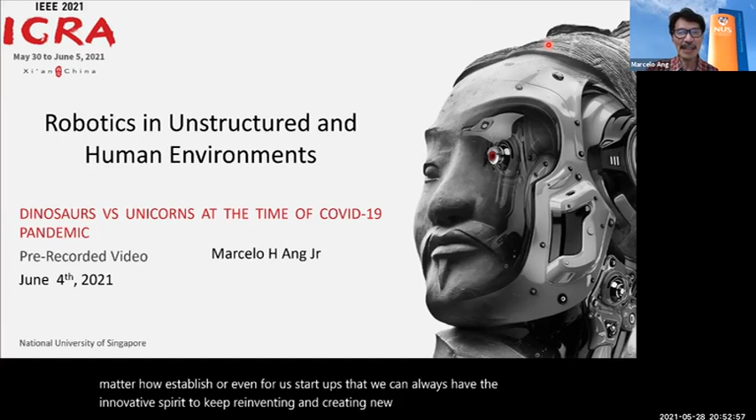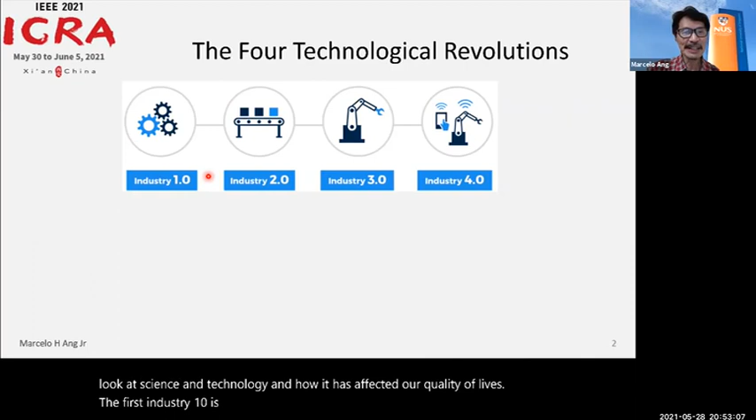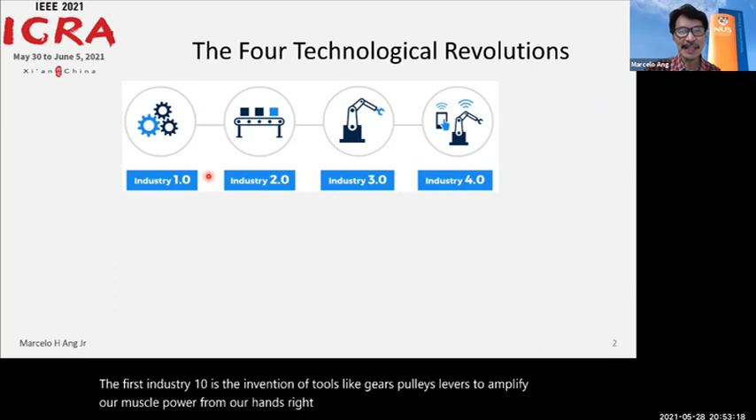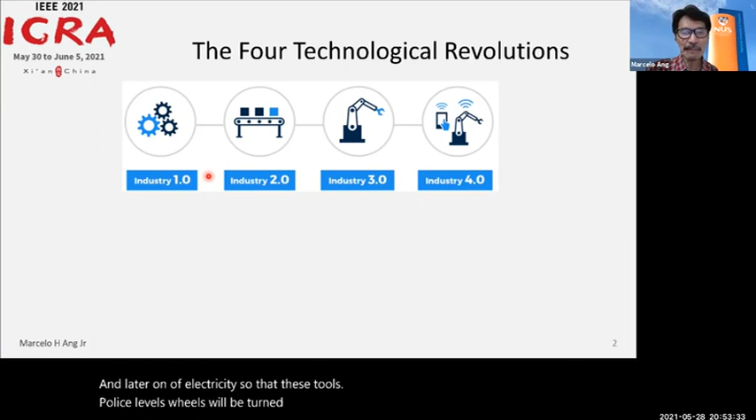So let's look at science and technology and how it has affected our quality of lives. The first Industry 1.0 is the invention of tools like gears, pulleys, levers to amplify our muscle power from our hands, using mechanical advantage. Then came the invention of steam power and later electricity, so that these tools, pulleys, levers, wheels, will be turned by electrical or steam power, no need for muscle forces, human hands.

Then came the birth of computers, and this gave birth to robotics and automation, where the computers will create the programs or run the programs to make the links of the robot move. These robots move in structured environments where the infrastructure is fixed and there's human-robot separation.

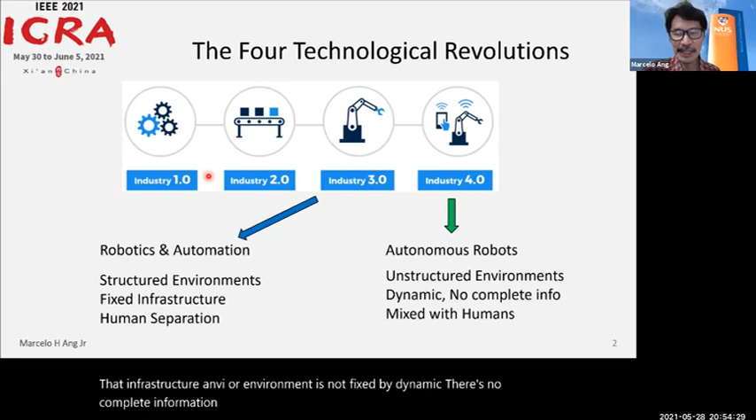Today, Industry 4.0 is really taking this further into autonomous robots, from factory automation to autonomous robots working in our homes. Instead of structured environments, it will now be in unstructured environments. The infrastructure environment is not fixed but dynamic. There's no complete, known information about the environment. And there is a mixture - humans and robots work together in everyday life. In other words, the robot is our ultimate tool, our ultimate human companion to help in our everyday lives.

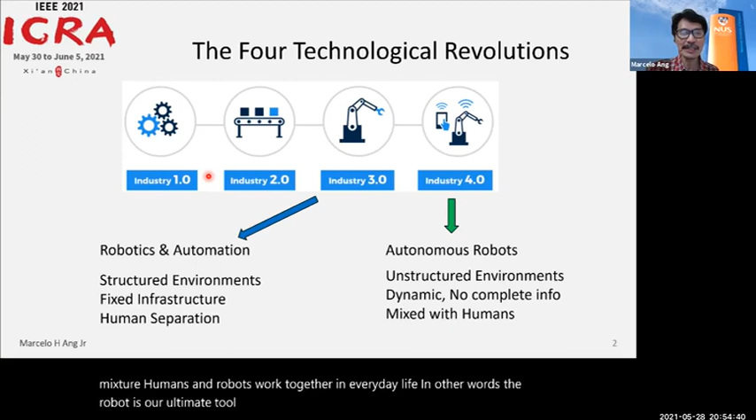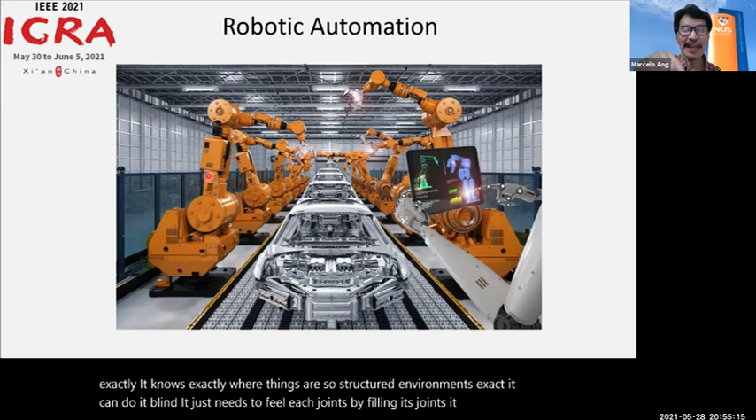So how do we go from this situation, robotics automation, to robots in everyday life? Notice here, you have the robot welding a car. It knows exactly where the car is, so it doesn't have eyes, it doesn't need eyes. It doesn't need external sensors because it knows exactly where things are. So in structured environments, it's exact, it can do it blind. It just needs to feel its joints. By feeling its joints, it knows the position of the end of its hand and can do welding, for example.

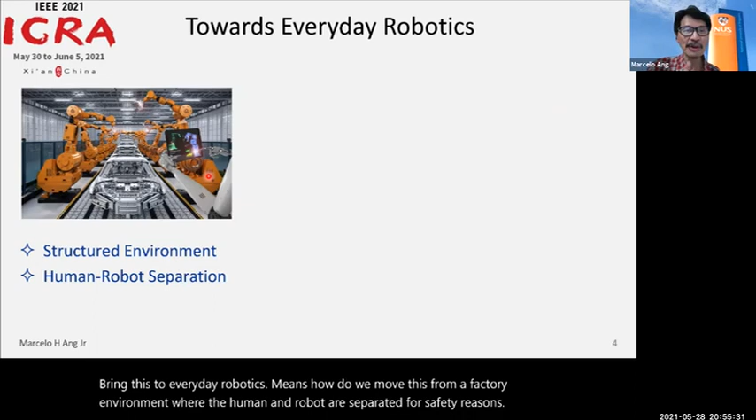Bring this to everyday robotics means how do we move this from a factory environment where the human and robot are separated for safety reasons. As a matter of fact, this robot on the left is in a cage. When the cage opens, the robot shuts down. How do you go to shopping malls, our grocery aisles, our hospital wards, our homes, our schools, our parks? So everything else on the right is our environment except the factory. So rather than structured, it's now unstructured. Rather than human-robot separated, there is close human-robot interaction.

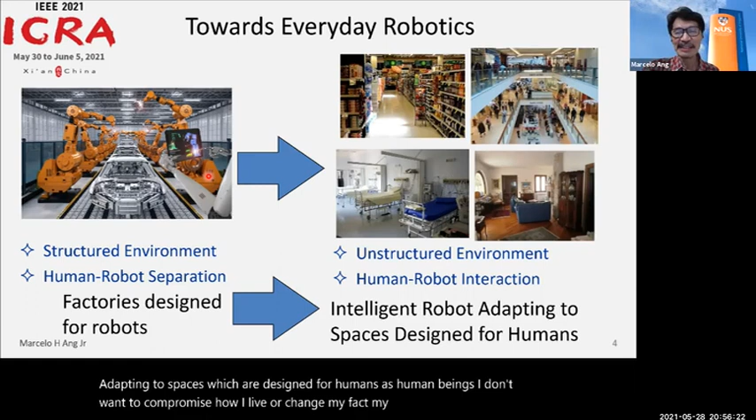So the challenge is really how do we move from factories designed for robots to intelligent autonomous robots adapting to spaces which are designed for humans. As human beings, I don't want to compromise how I live or change my home environment because the robot will help me. I want the robot to adapt to this environment.

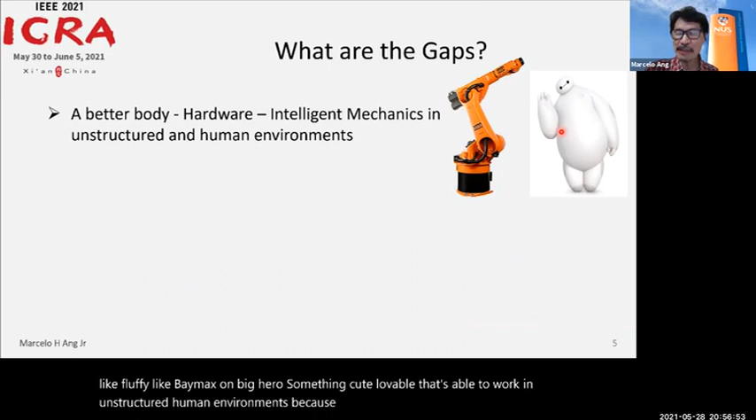So what are the gaps in this? There are mainly many gaps divided into two kinds. One is we need a better body. Can we move from the typical industrial robot like the KUKA KR60 to something like fluffy, like Baymax from Big Hero - something cute, lovable, that's able to work in unstructured human environments because it's lovable. Humans are more affectionate to it, are more open to working with it. And even if it makes a mistake, it doesn't hurt you because its body is soft.

We need a better mind, right? Traditional programs use a flowchart of doing things. Another way of doing things intelligently is learning from experience by imitating how people do it, or doing things by trial and error. And these kinds of intelligence, there are two kinds, if I grossly divide it into two categories: low-level intelligence, or what I call reflex action, and high-level intelligence, where there's higher level decision making or maybe cognitive processes.

A better body, a better mind, all come together to create a human-centered robotic manipulator that will help us as human beings in doing our everyday life.

Two important questions are as follows. What is the right level of autonomy? Some people say robots will replace human beings and they're afraid of that. I think that will never happen because a human is still needed to turn the robot on or off, or to do some form of supervisory level control. There's a level of autonomy the robot does, but the highest level is still human in the loop. But perhaps in the very distant future, maybe one day humans will no longer need to turn the robot on because the robot knows when to wake up itself.

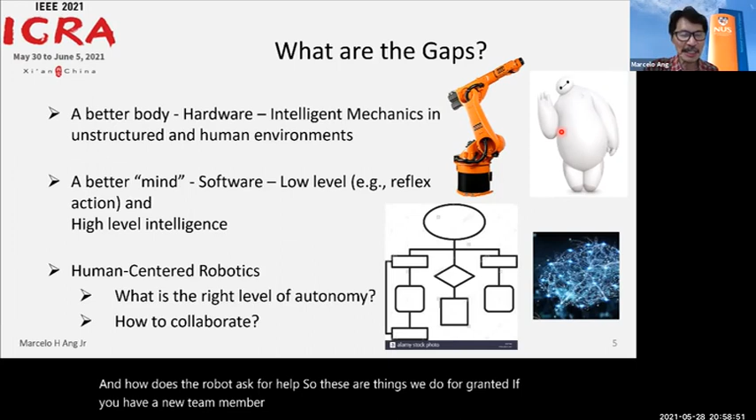Second question is, how do you collaborate? This is an important question. How do you teach a robot what you want it to do? And how does the robot ask for help? These are things we take for granted. If you have a new team member in your group, the two of you will do a project or job together. Somehow you learn how to collaborate as you continue to work with each other. But how do we learn how to do that? If we think about it, it's not so easy. We don't know how to do it, but we expect robots to be able to do it. It's kind of hard.

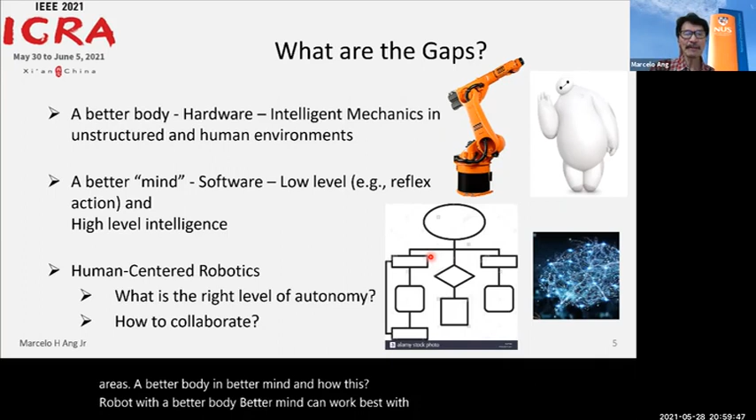Maybe the key is trying to find out how our human mind really works. That's why there's a lot of interest in neural networks, or the brain. The brain somehow has some magic of learning from experience rather than doing it through a flow chart or traditional programming method. So there's a lot of work for all of us to do in these two areas, a better body and a better mind, and how a robot with a better body and better mind can work best with human beings. These are the gaps we have to work on.

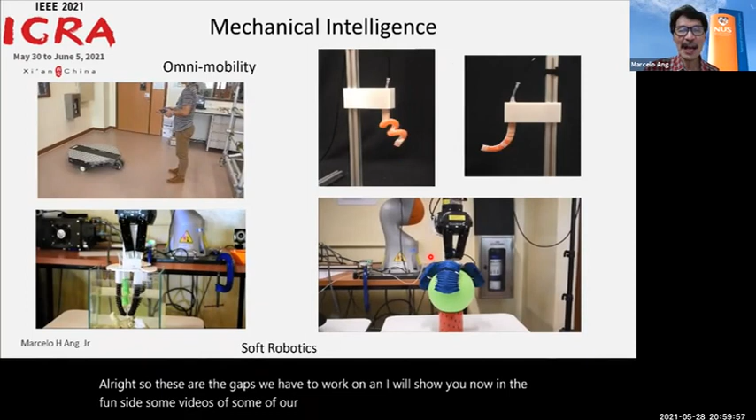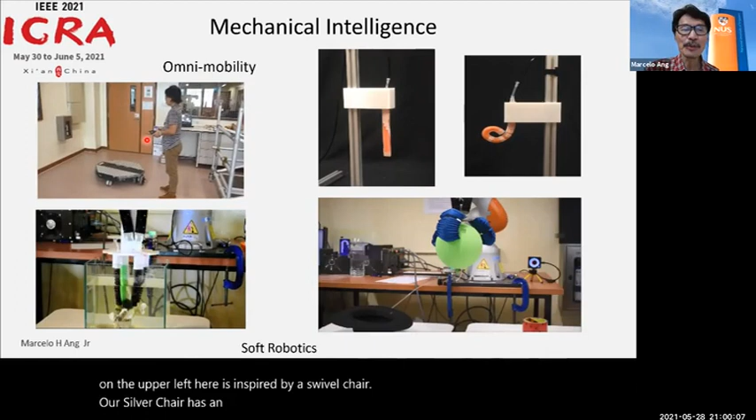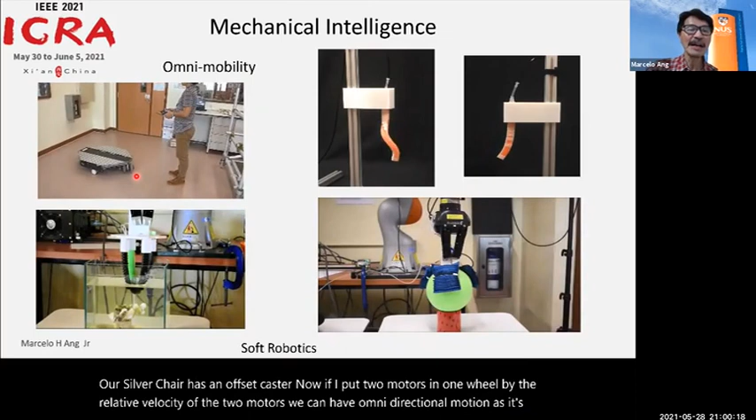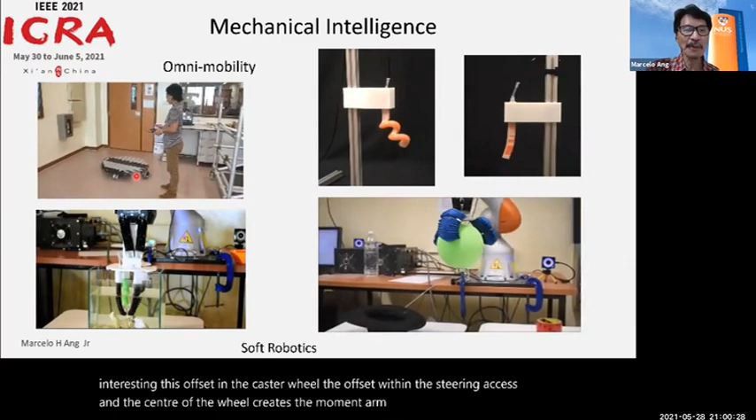I will show you some videos of some of our work that I call mechanical intelligence. On the upper left here is inspired by a swivel chair, which has an offset caster. If I put two motors in one wheel, by the relative velocity of the two motors, we can have omnidirectional motion. This offset in the caster wheel, between the steering axis and the center of the wheel, creates the moment arm that provides this robot omnidirectional motion without any kinematic singularities.

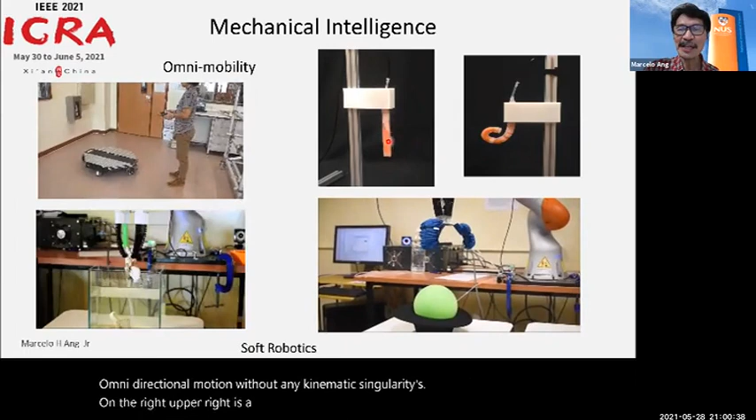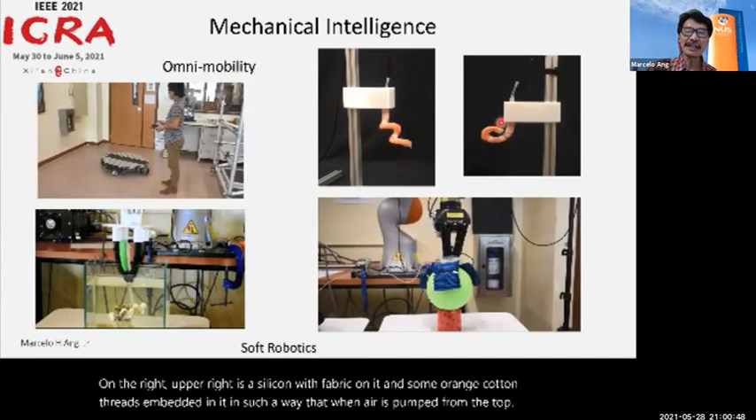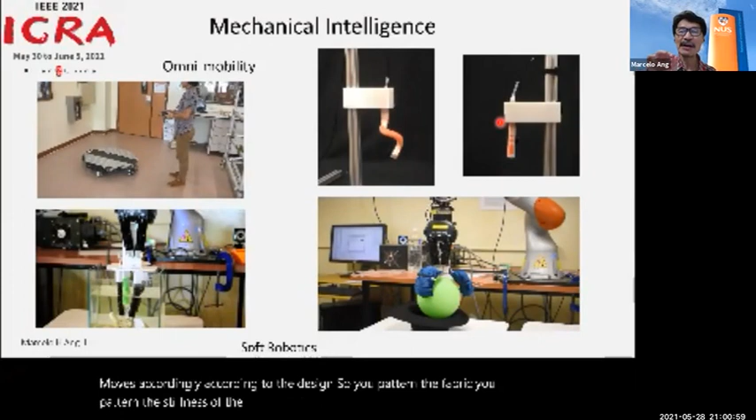On the upper right is silicon with fabric on it and some orange cotton threads embedded in it, such that when air is pumped from the top, the finger moves accordingly, according to the design. You pattern the fabric and the density of the cotton threads so that it has variable stiffness along different parts of the finger.

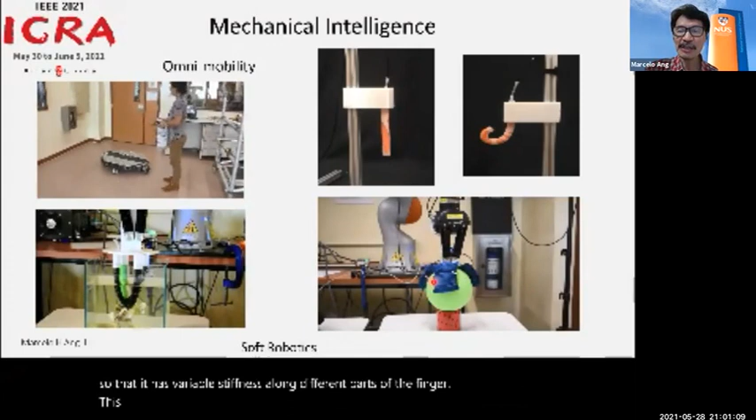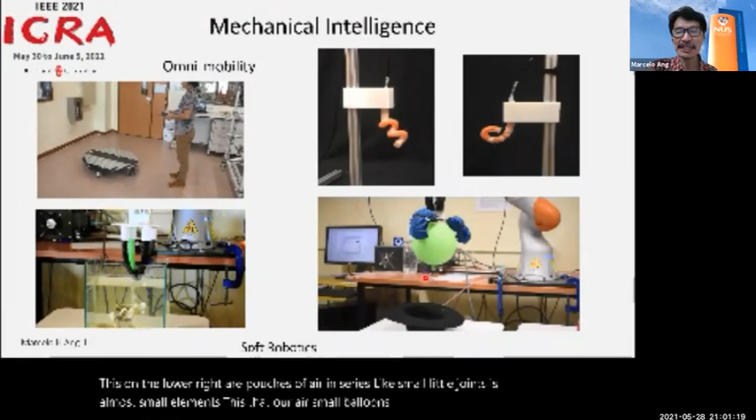On the lower right are pouches of air in series, like small joints, almost like small elements or discs of air, small balloons. By powering the balloons in sequence, this can form a finger.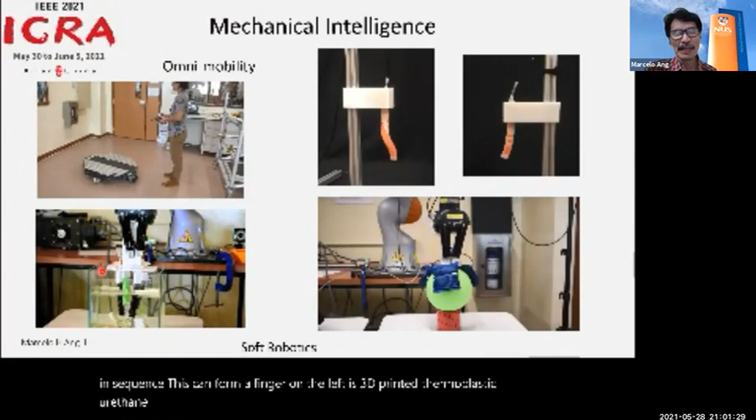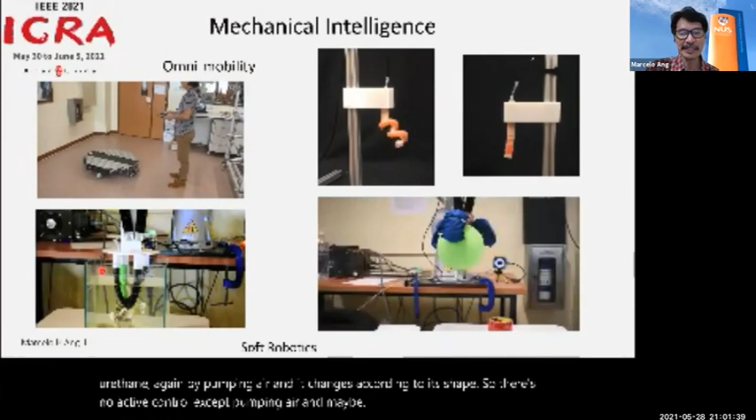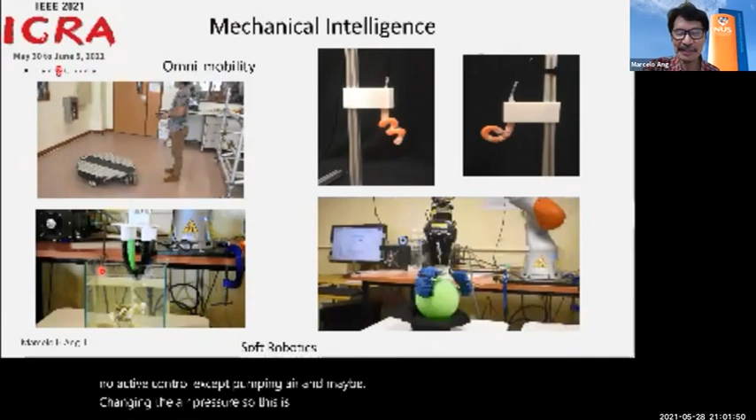On the left is a 3D printed thermoplastic urethane that, again by pumping air, changes its shape. There's no active control except pumping air and maybe regulating the air pressure. So this is passive, but it has some kind of intelligence by design. At the same time, it's stupid because it always moves the same way, it always coils, it always curves. You can only change how much it coils or curves by the air pressure.

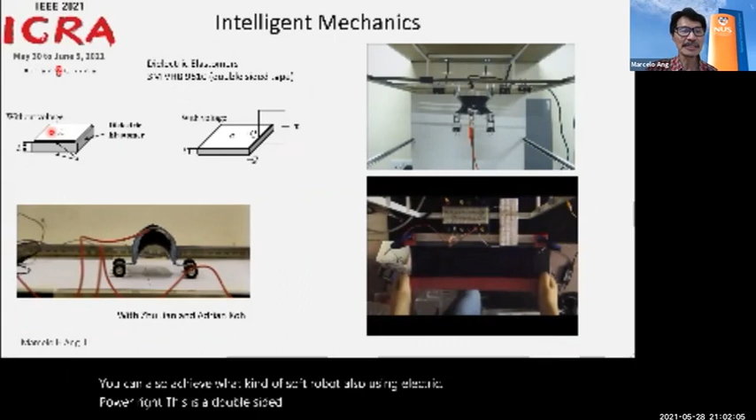You can also achieve a kind of soft robot using electric power. This is a double-sided tape, a dielectric elastomer. Once an electric charge or electric field is applied across this elastomer, the elastomer is compressed and expands in surface area.